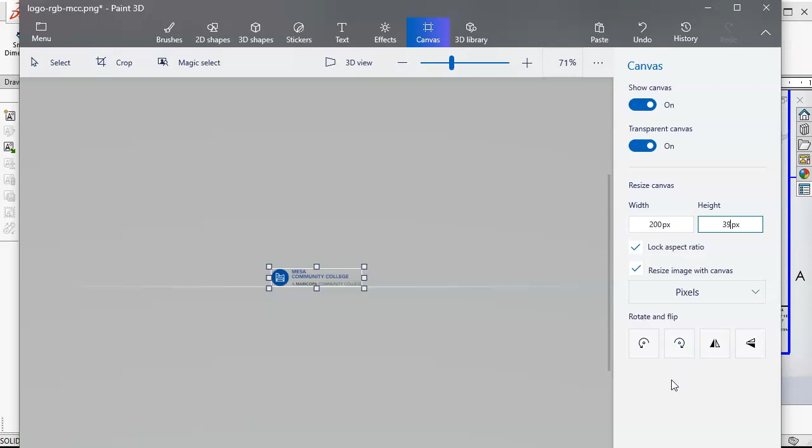So the pixels should stay the same. Try one more time with the Control C. Alright, so that's interesting, it kind of pixelated it. Notice it's still pretty good size, so it would have to be a little bit smaller.

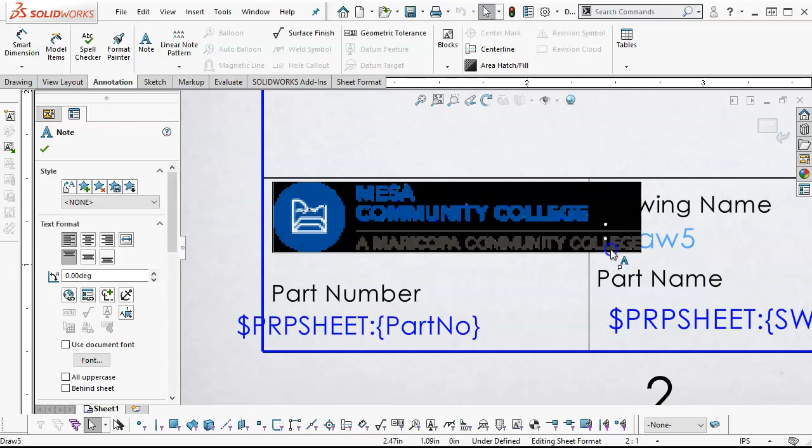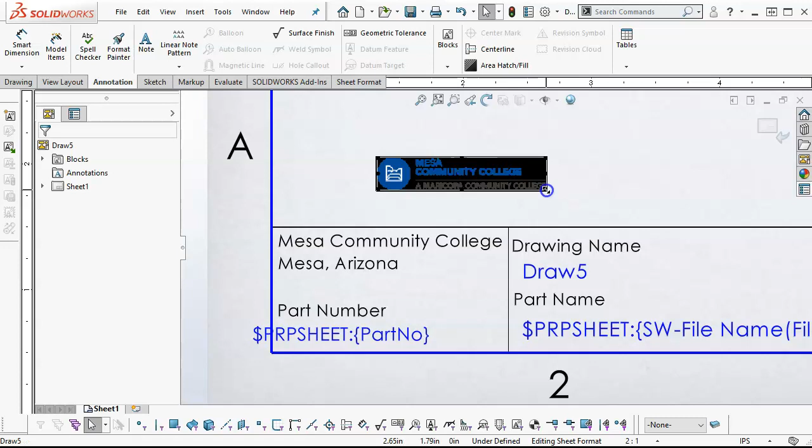Main thing is that I don't have a huge... I'll try not to move that around too much. I don't have a huge file that every time I add another sheet is going to get continuously bigger on the file size, because the PNG is a couple of like a meg or so.

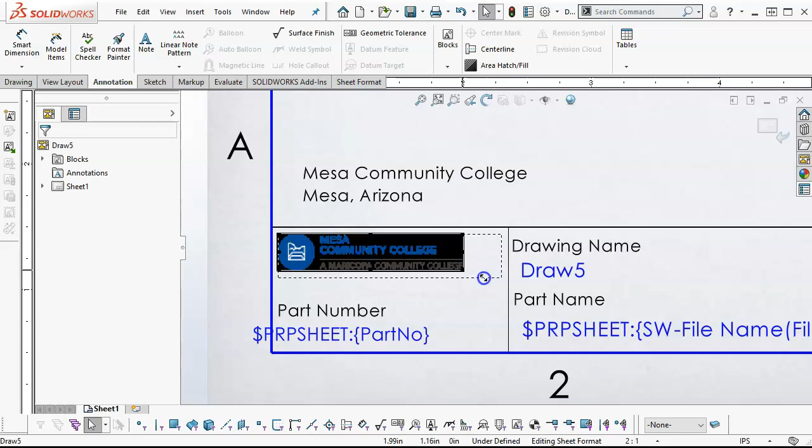Alright, so if I was to place that, still finding the other one. Alright, so it's going to take a little bit, and probably didn't need to make it quite that small. But if I get it to where it will cover up my text, then if something happens to the logo, we will still have the text in the background.

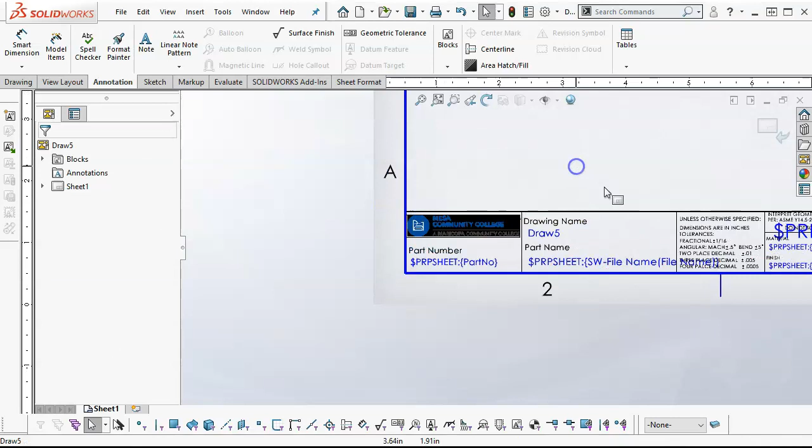Alright, so that looks like it is center justified. We will update that one. Open up a little bit more room there. Those all look pretty good.

Alright, so we can do a save sheet format. Still have the landscape. Yes, I'm going to replace it, and then we want to make sure to close it. And I don't think I need to save.

Alright, so the test is to do the template one more time, and it did not stay with the sheet format. So I'm going to work on that logo a little bit more and see if I can get it to clean up. Alright, so if I edit the sheet format, so I guess I should have hit save that one extra time.

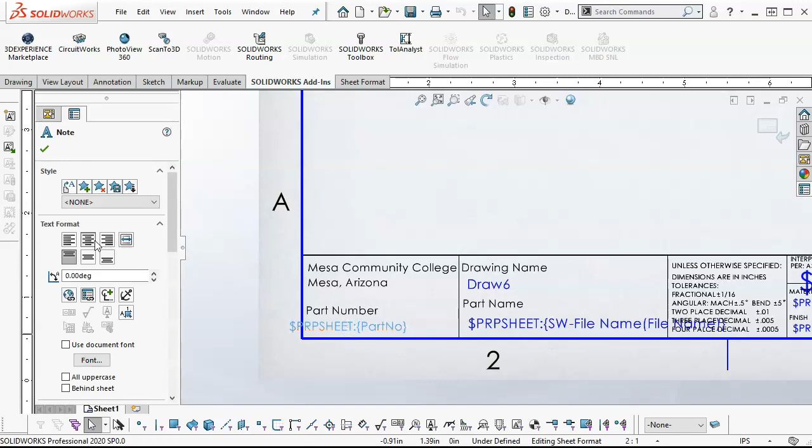Alright, so we'll just kind of self-center that, or change it from center to the left. And then outside of the sheet format, save sheet format. So it seems like we're saving sheet format an awful lot, but I want to make sure, just like that last go around, that it has all the current information in it.

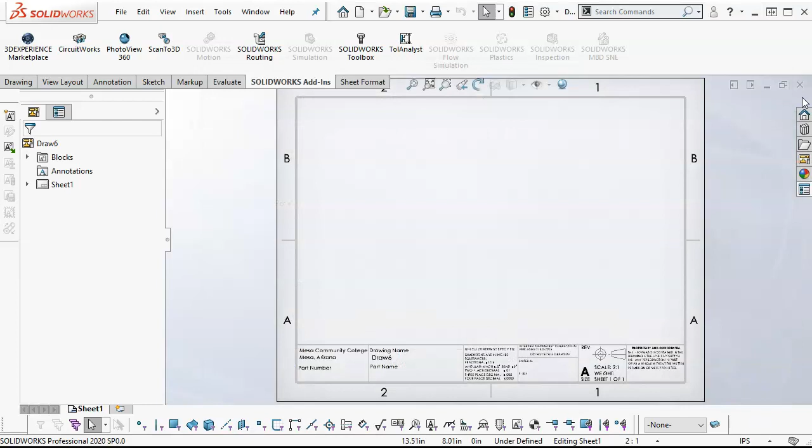And then it's asking to just save the drawing. Well, I don't really need the drawing. So we'll go one more time, and then we'll be ready to update. Nope, still didn't catch it.

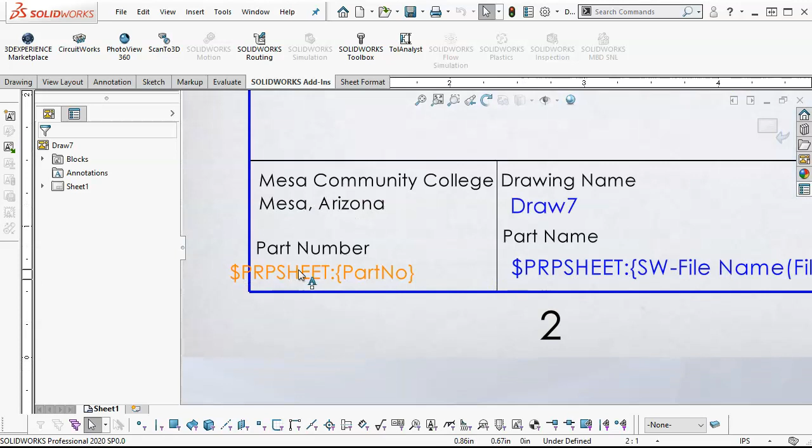So in that case, maybe there is something tied to the drawing template that I need, because I've always been saving the drawing template, and that was kind of my experiment, was is there going to be any issue with it.

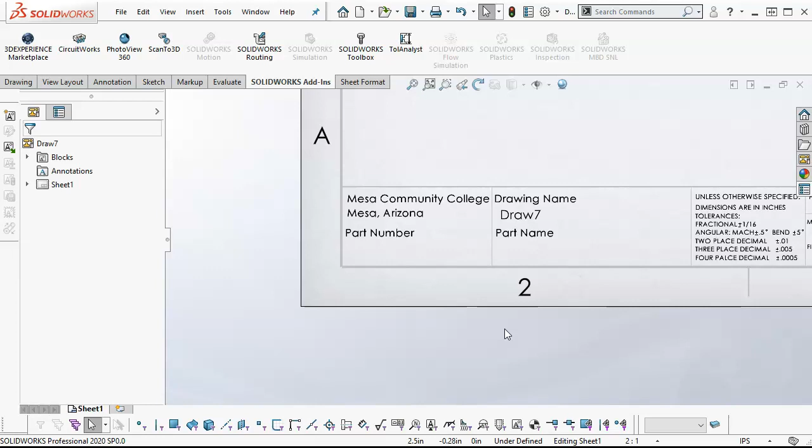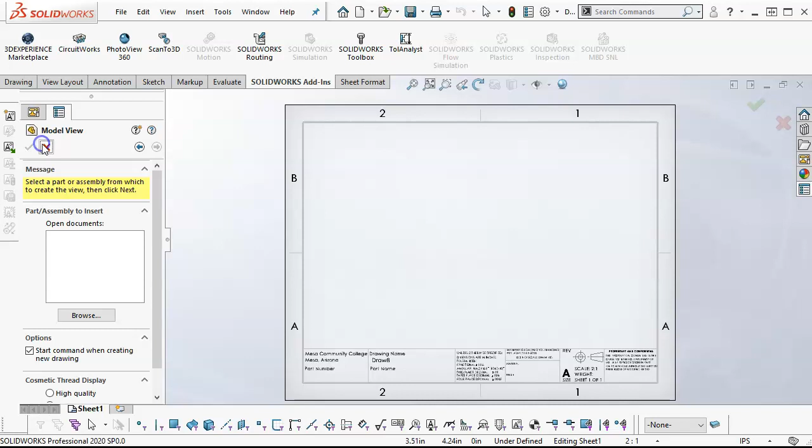And then we'll do the file, save as, drawing templates, give it the overwrite, close it so we don't keep anything in there. And should have picked a better indicator that it was working, but now we have the left justification on the part number. All right, so that all is working out.

So I want to update. If I go back into, so it's going to go back to the same templates. I saved my cube there as the sample piece, but notice it's not showing up in the template.

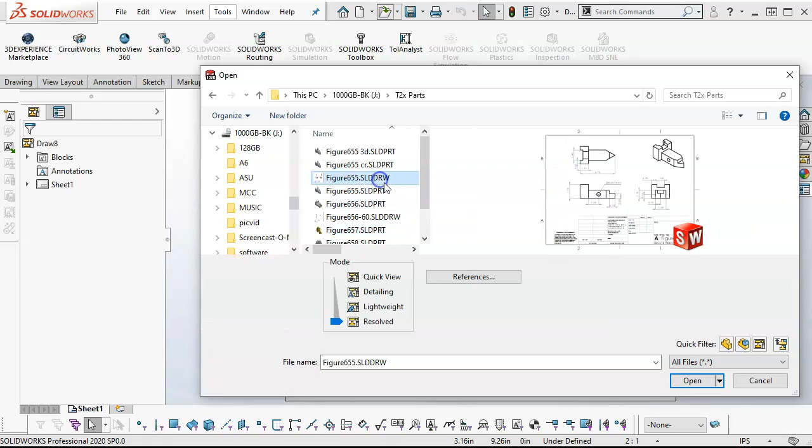And then somewhere, see, you got to remember where I put. All right, so the external drive, the parts, and then we're going to open up the drawing. All right, so this has the previous format in it, so we are going to go to the properties. I'm going to scroll down to find my landscape, apply the changes, and then if we need to rebuild.

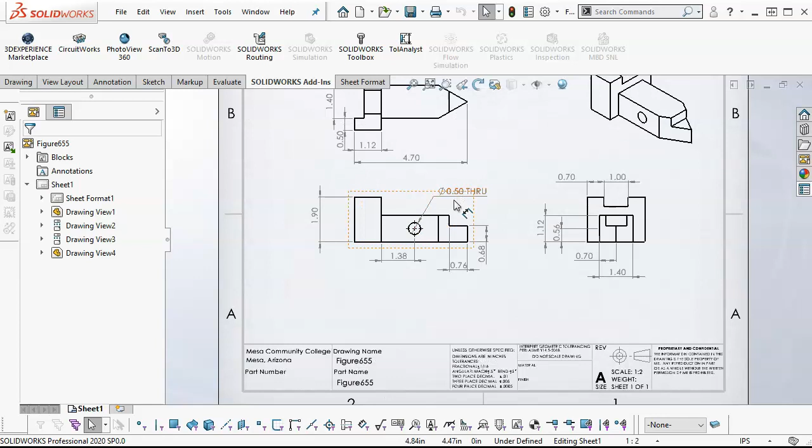So no part number was applied to this one, so if I open this part back up, I'm just right-clicking in the view area, telling it to open the part. I'm back to the custom properties.

This is going to be figure, I'll do all caps, and I think this one was 655. Okay, and then the part name was the safety key.

Put it in there. So we hadn't added material yet. And revision A. This picked up a previous, so this is probably pointed to the 2017 because I have the number in there.

Material, well, we're just going to stay with the plain carbon steel. Yes, save it. And oh yeah, that one is mass in pounds and of 2.25.

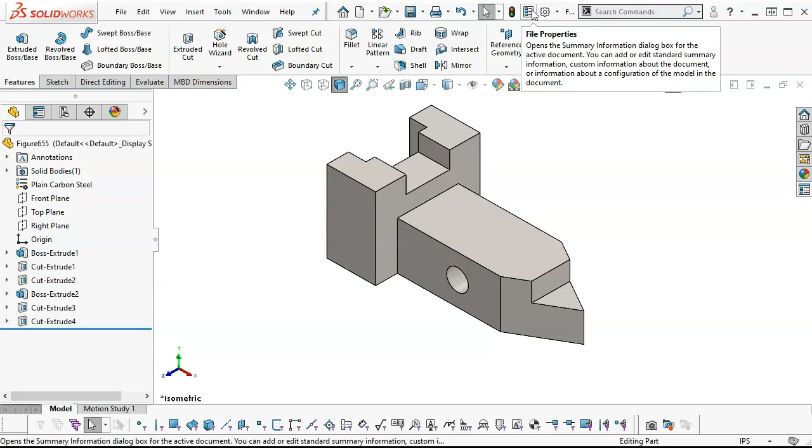So this is a different template that are custom properties that I created. Main thing is once I populate that, it is going to transfer the information. Problem is going to be everything in here is configuration specific, where the other one's going to have a little conflict.

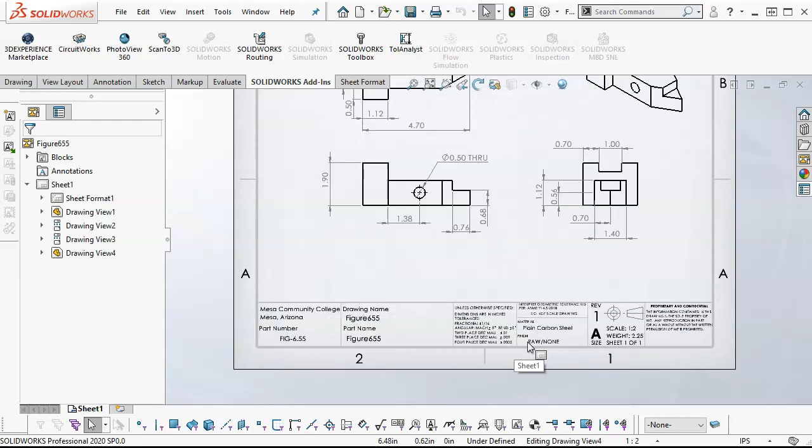So maybe we'll use this as an example of what happens when we have competing custom properties. Alright, but the names all stayed the same, and when we come back to save this, so part name, drawing name, and all of that information, plain carbon steel, raw none, comes across, mass. Alright, so we've kind of proven that out, and that will give us a good start to keep those items in check.

So let's go back to the other drawing, and if we need to, one of the things we'll want to check is under the more properties that this did picked up that one. So...

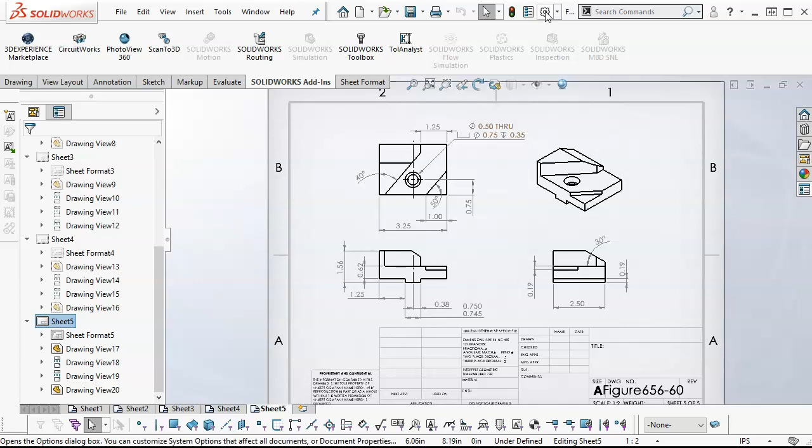Interesting that as file locations didn't get saved. So let's just do a quick double check. File locations, and we're looking for those custom property files.

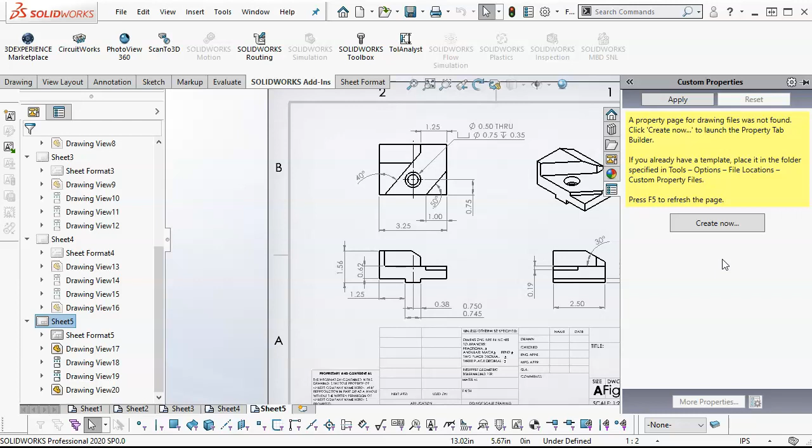No, that's the location, and it should let me have it. How about the F5? Interesting. Alright, so let's go to properties.

Maybe because that one is not current. Let's see, select sheets to modify. We're going to do all of them and apply the changes. And then the block came across.

Alright, so I still have something going on in the block. Pretty much need to edit the sheet format and then explode the block, and then I should be able to do a make block within that document. If not, I'm just going to have to explode it and leave it. Alright, because I can't have it barking at me every time.

Alright, so this one, let's see if our properties came up. Still not picking it out. If I go to create now...

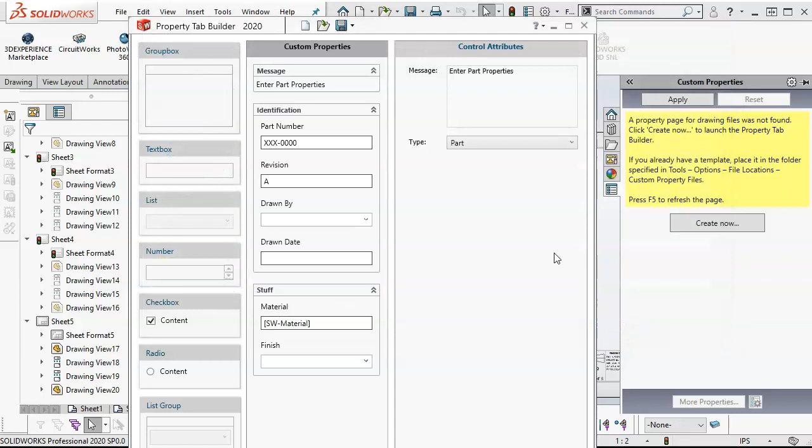Let's see if we can just open up that template. I'm not sure why it's not reading it, but if we save it, close it... nope. Alright, so still going to have to look into that one.

We got most of it. One more pass to make a correction. Okay, now that I'm paying attention to what I'm doing, I did it before and now I have created a drawing custom properties. So when I come over here, now I have something that is usable.

So this was figure 6.60. And the revision drawn by, drawn date is today. Material, we'll set the finish. Alright, so you can see the difference between the two custom properties.

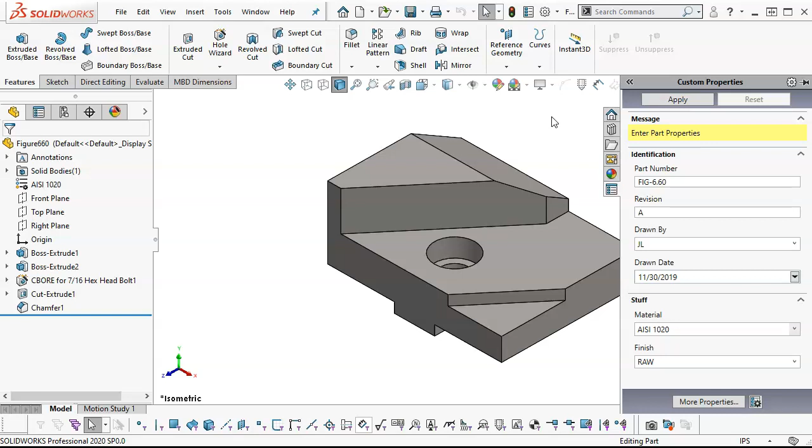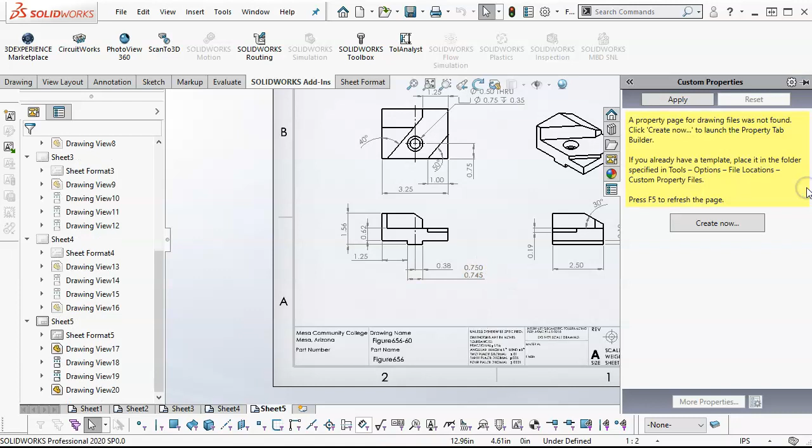Try Control Q. Alright, so not cooperating with this one. And the custom properties is still being tied to that. Alright, so this should have been in the sheet format. Pick another one.

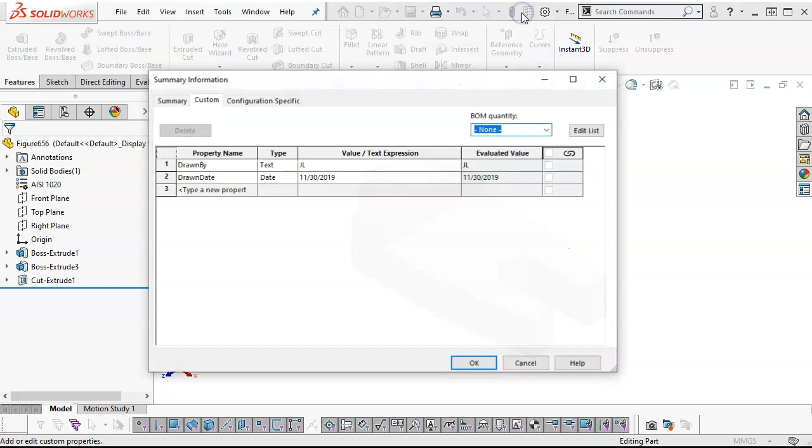Today, finish, we'll leave raw, apply it, and then I just need to make sure that it went to the file properties. So drawn by, drawn date, configuration specific, yeah, all in there.

Alright, I did a Control Q on the keyboard, which forces it to completely rebuild. So other than my naming, oh yeah, that's the drawing name, 656 through 60, and then the figure and the part. So each one of those comes up a little bit different.

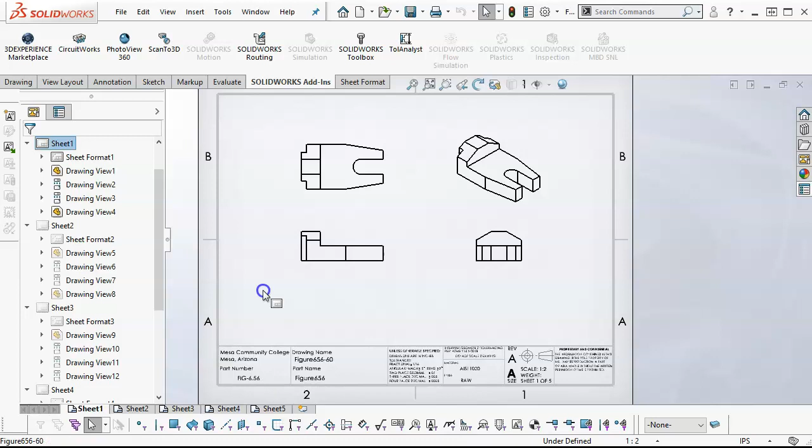Let's see if sheet 5, okay, so that updated. So I was doing the what would be a Control B, Control Q forces the complete rebuild. Alright, so we got most of our information working correctly. If it's a little bit longer, we have some room.

Also, if I find out that I don't need that much and I want to add additional information, I can build that in. Alright, so still part of the process of debug, observe what's going on with the insertion of the parts, making sure the properties are coming across and verifying things as we go.